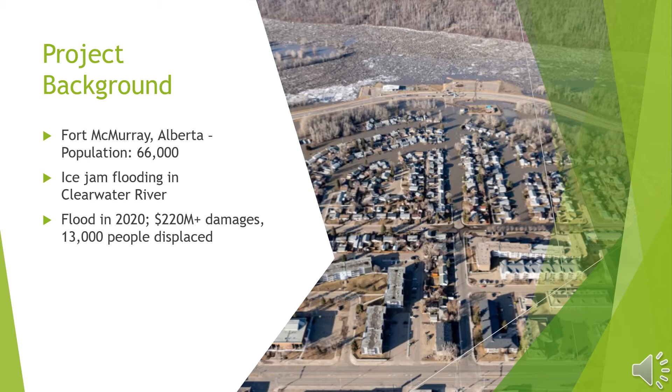To help guide the solution design, ACNA developed 5 key project objectives for the client that the detailed design is expected to meet. First, the total capital cost should not exceed the strict $220 million budget. This was derived from the insurance damage incurred by the recent 2020 flood in the lower town site of Fort McMurray. Second, the design must eliminate 100-year probable flooding. In other words, it needs to mitigate up to and including the previously devastating ice jam flood elevation of 250 meters in the Clearwater River adjacent to the city.

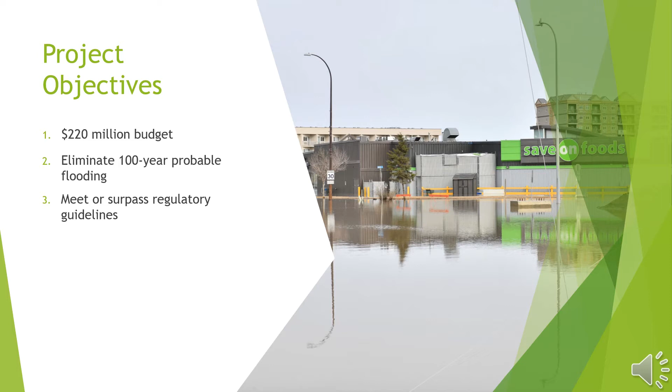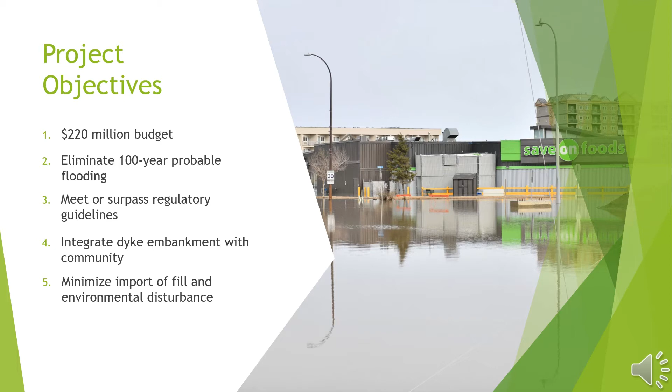Third, the detailed design will meet or surpass applicable regulatory guidelines using ACNA's technical expertise. Fourth, the dyke system should be integrated among the community due to its proposed route along the scenic river shoreline. And finally, ACNA will minimize the import of fill by using native cut material from the open channel section for the embankment.

Several channel design alternatives had been generated in order to firstly meet the second objective of an optimized flood reduction, and secondly, to work within our realized constraints. These included a mix of square and trapezoidal channel sections along with varying widths and heights. Trapezoidal channels were found to be heavily constrained by the steep cross-sectional grade of the hillside we were working with. Therefore, ACNA has finalized the design with a square section 20 meters wide by 6 meters high. This width and height has been iterated for a maximum channel drawdown to 247 meters and a 1 meter freeboard. The channel's route roughly follows the hillside contours and is about 1 kilometer long at 0.1% centerline grade.

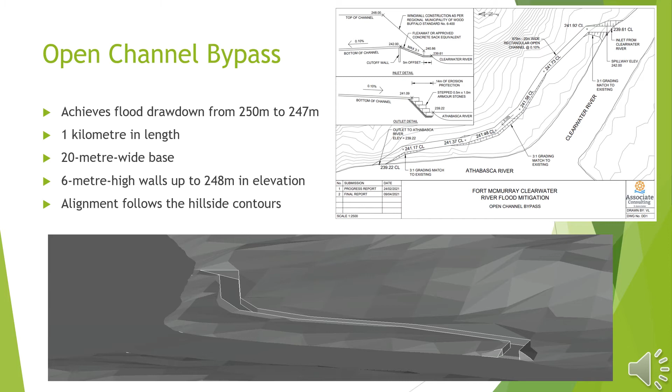2 HEC-RAS models have been run in the process of selecting a final channel geometry and route. These both achieve a 247-meter water surface elevation at the shoreline of the Clearwater River during the 100-year design flood event. Due to the seasonal nature of ice jam floods occurring in the springtime, the first model uses peak historical spring river flows along with a calibrated ice depth of 1 to 2 meters, depicting moderate ice jam conditions. The second model was run in order to observe conditions at a reduced river flow but ice depths of 3 to 4 meters. Fortunately, this model does not limit the solution and maintains a drawdown to 247 meters or less at more realistic ice depths.

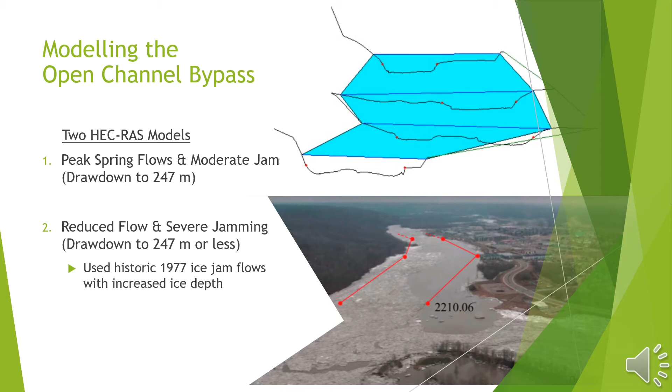A concrete wing wall inlet has been designed to receive incoming flows from Clearwater River. Regional Municipality of Wood Buffalo standard drawings have been used and modified slightly to suit this very unique project.

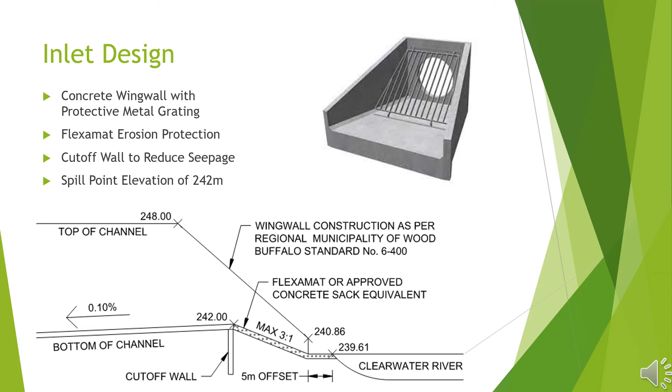The proposed structure shall contain metal grating to prevent ice and wildlife from interfering with the channel's hydraulic performance. Beyond the concrete channel bed, the earth is graded downwards, as seen in the figure, and lined with Flexamat to mitigate erosion. Additionally, a cutoff wall will be installed to reduce seepage below the structure. The spill point is set to 242 meters in elevation, above which point the entire channel will become online.

The second part of the proposed design is a 3-kilometer long dyke system, stretching along the northern edge of the town. It is meant to work in tandem with the open channel, in an effort to prevent flooding to Fort McMurray. A top elevation of 248 is maintained throughout its entire length, providing a 1-meter freeboard above the new flood level of 247. The alignment of the embankments follows very closely to the edge of the river, with its height and width varying along its length.

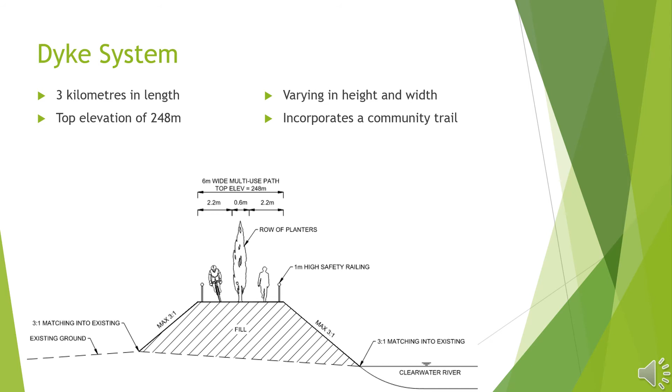As you can see here, a vision for a multi-use trail has been incorporated into the dyke system. This will give residents of the town an enjoyable infrastructure to walk or bike on, and adds further utility to the proposed design. Beyond the 6-meter wide trail, the embankment is to be graded down at a 3-to-1 slope for soil retention towards the existing ground. This design is really meant to complement the open channel, as the two will work together in their own ways to prevent flooding to the town.

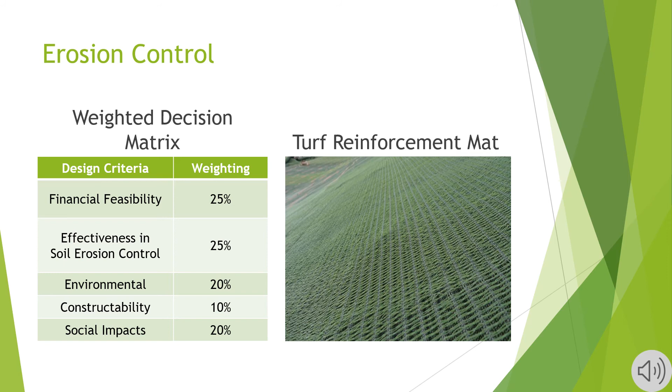The ACNA team completed a weighted decision matrix to determine the erosion control method. The team pulled their design objectives into the weighting of the design criteria, such as meeting the strict $220 million project budget and ensuring that the design is aesthetically and socially accepted by the local community. The erosion control method that scored the highest was a turf reinforcement mat in 2 of the 3 locations, and thus will be selected to be recommended at all 3 locations to ensure efficiency during the construction phase.

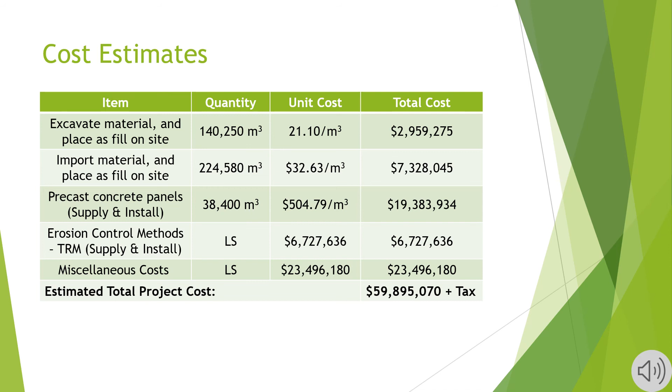ACNA is extremely proud to announce a solution that is below the $220 million budget without compromising performance. The overall estimated project cost is approximately $60 million and includes the following items as shown. The largest driver in cost is land acquisition, which accounted for 36% of the total estimated project cost and is located in miscellaneous costs. So, how well did we solve the problem?

The team initially set out 5 objectives. The first objective was meeting a $220 million budget, and the team met this objective with the total estimated project cost of $60 million plus tax. The second objective was eliminating 100-year probable flooding. The team achieved a flood drawdown from 250 to 247 meters, with a 248-meter elevated shoreline embankment, meeting this objective. The third objective was to meet or surpass regulatory guidelines. The team referenced multiple sources, including Regional Municipality of Wood Buffalo guidelines.

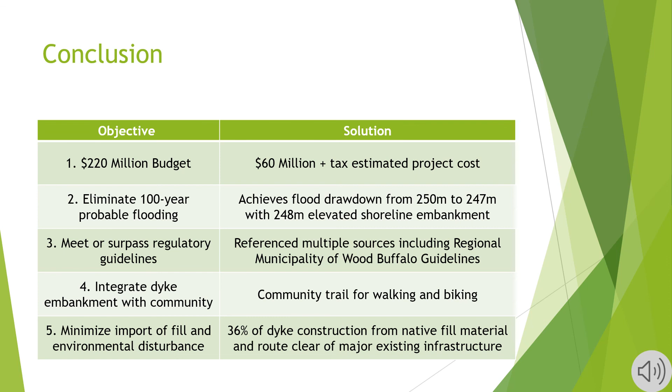The fourth objective was to integrate the dyke embankment within the community. This objective was met with the design including a community trail for walking and biking. The fifth and last objective was to minimize import of fill and environmental disturbance. The team met this objective with 36% of the dyke construction using native fill material, and the dyke's footprint is clear of major existing infrastructure. Associate Consulting and Associates strongly believes that the proposed solution outlined in this presentation will effectively reduce ice jam flooding in the town of Fort McMurray and save the town and its citizens millions of dollars over the long run.